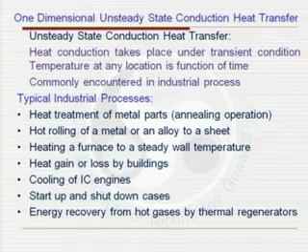This unsteady state heat conduction phenomena is a very common process in industrial processes, very frequently encountered. Typical industrial processes include heat treatment of metal parts, annealing operation, hot rolling of metal or an alloy to a sheet, heating a furnace to a steady wall temperature, heat gain or loss by buildings, and changes of environmental temperature. Suppose there is a pipeline transporting oil or water, buried under the earth at a certain depth, and the atmospheric temperature is suddenly reduced, particularly in the winter seasons.

That kind of situation is a practical example of unsteady situation, which may not be directly related to industry, but related to common life of human beings. Similarly, cooling of IC engines, startup and shutdown processes in many industrial processes involving heat generation or heat transfer encounter an unsteady state situation. There is also energy recovery from hot gases by thermal regenerators used for energy recovery, particularly hot energy recovery from flue gas. These are typical examples of several industrial processes where unsteady state heat transfer takes place.

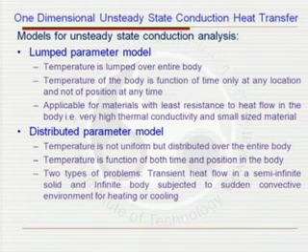There are also two situations we will discuss. One is the case of transient heat flow in a semi-infinite solid, and the other an infinite body subjected to sudden convective environment for heating or cooling. We will discuss these issues subsequently in different lectures. So there are two problems: transient heat flow in a semi-infinite solid, and in an infinite body subjected to sudden convective environment for heating or cooling. These are the two different one dimensional unsteady heat transfer problems under the distributed parameter model.

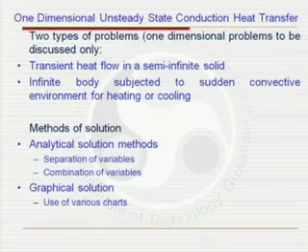Now, the solution for this kind of situation is not very easy, these are a little complicated. So we will concentrate on one dimensional cases, because three dimensional cases are more complicated. We will try to simplify the cases as much as possible, just to have an understanding of how the temperature profile exists. There are a few ways of doing the solution for these cases, and we will use two different approaches.

One is the analytical solution method, and the other is the graphical solution. Practically, the analytical solution method means the problems will be solved by the separation of variables method and the combination of variables method. So we will take up some cases for separation of variables and combination of variables, to show how heat transfer problems can be solved.

Then there is the graphical solution. In this case, the temperature profile has already been worked out by somebody else and given in the form of figures or graphs. For our learning purpose, and also for practical applications, students can find out the temperature for a particular situation using these figures or charts. At the same time, not only the temperatures at different locations of the body, but also the heat flow rate can be calculated using various charts or figures available. So we will see, with the help of certain problems, how to make use of these charts.

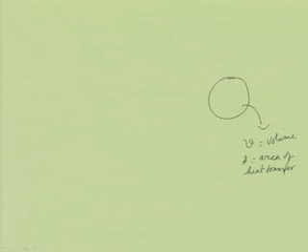So this is some object which is hot and is in some outer environment. This is the environment where heat is being transferred from it. So if I say that heat Q dot is being transferred to the environment, and let us say that environment temperature is T infinity, the temperature of the environment.

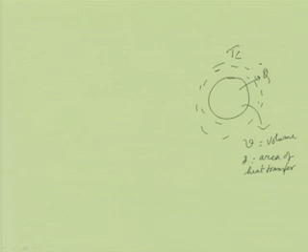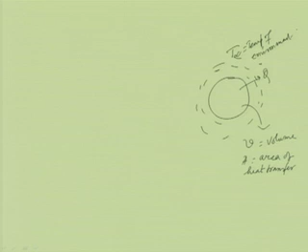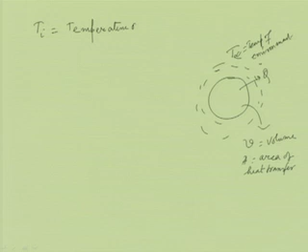And T_i is the temperature of the body at t equals to 0, that means the initial temperature of the body. Now, T infinity is less than T_i, that means heat will be transferred from the body to the environment.

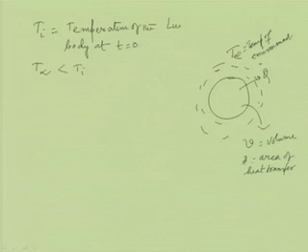Now, what we will assume is that since this is the lumped parameter model case, temperature is uniform throughout the body. Now what is happening with time? The internal energy of the body is going to come down. So the body loses heat energy, or its internal energy, and it gets transferred to the environment. So the energy lost by the body will be reflected in terms of a decrease in temperature with time.

So what we will write is that if rho is the density of the body and V is the volume as I discussed, this is the mass, and Cp is the specific heat, that is, the heat requirement per unit kg per unit mass. So rho V Cp, or m Cp, into dT by dt will be the change in internal energy. And because it is going to a lower temperature, dT by dt is a negative quantity, so we write change in internal energy as minus of this, making the total quantity positive.

Change in internal energy would be equal to the amount of heat lost to the environment, and that happens with the help of convection. So this is an example of conduction and convection phenomena taking place in tandem, together. Heat is conducted from the body to the surface, and from there convection phenomena takes place. Then we write that H is the convective heat transfer coefficient, and A is the area of the body.

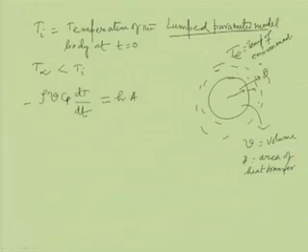That is the surface area of the body. We understand that in case of a sphere it is 4 pi r square, in the case of a cylinder it is 2 pi r L plus 2 into pi r square, that is the two end areas added. Similarly, in case of a cube, it is 6 into side square.

So this will be the surface area of heat transfer, meaning the area which is exposed to the environment for the transfer of heat. Now, H A into, at any time t, the temperature of the body minus T infinity -- this is as per Newton's law of cooling, that heat transfer is H A delta T. So we write T minus T infinity in the same equation.

Now, this is a very basic equation for the energy balance that is happening. The rate of change of internal energy is equal to the rate of heat transfer by convection from the solid body to the environment.

We will assume that volume and area are not functions of time. Also we assume H, rho and Cp are independent of time, they are constant quantities. Thus, if we do the integration, we get T minus T infinity by T initial minus T infinity equals e to the power minus H A by rho Cp into V into T.

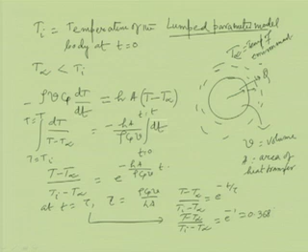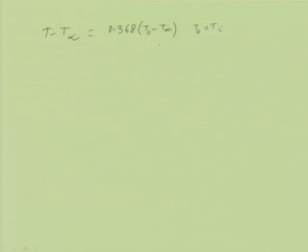So what does it mean? It means that T minus T infinity equals 0.368 of T naught minus T infinity. Initially, this was the temperature difference between the body and environment, and after time constant t equal to tau, that value is reduced to 36.8%. So at t equal to tau, t minus t infinity by t naught minus t infinity is equal to 0.368. That means, at time t equal to tau, the temperature difference in the body becomes 36.8% of the original temperature difference. That is the definition of a time constant.

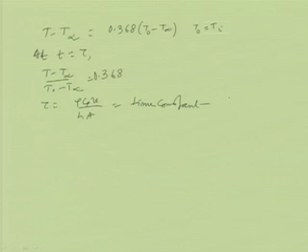So tau, when tau equals rho Cp V by H A, is called the time constant. So time constant is a time, and the unit of rho Cp V by H A is time. So time constant is the time that is needed for the temperature difference in the body to reach 36.8% of the initial temperature difference.

So initial temperature difference was T naught minus T infinity, and after the time constant the temperature difference T minus T infinity becomes 36.8% of T naught minus T infinity. This is called the time constant, and rho Cp V by H A is called the time constant.

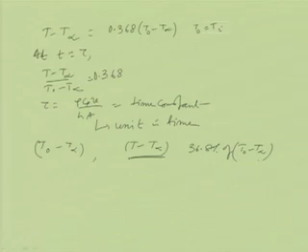This is one very important piece of information that we can develop from this, and in future when we study any first order processes, we will learn about this time constant. So this drop in temperature in the body is also viewed as a first order process.

Now if we go for further analysis, we have the expression H A by rho Cp into V, that is the inverse of the time constant. If we write this in a more organized way, we get H into V by A, by K, into K by rho Cp, into V by A whole square. This is the expression we are going to get.

We say that V by A is equal to L, the characteristic length. We can easily understand that V by A is the characteristic length, because V has units of volume, meter cube, and A has units of area, meter square. So V by A has units of length, and we call V by A the characteristic length. So we write this as H L by K, into K by rho Cp.

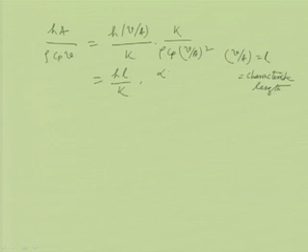We know that K is the thermal conductivity of the body, and rho Cp, we know alpha, K by rho Cp, is the thermal diffusivity, which has units of meter square per second, and V by A we will write as L square.

This is conductive resistance to convective resistance, and both are for heat transfer. So, it is a ratio of two resistances, Biot number is a ratio of conductive resistance to convective resistance, for heat transfer. And the important point here is...

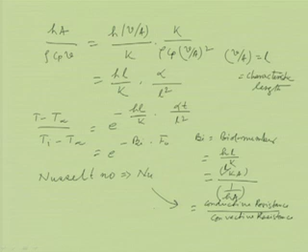In subsequent lectures, we will come across another terminology called Nusselt number, denoted as Nu. This also has a similar physical significance - it can also be expressed as conductive resistance to convective resistance. But the difference between Nusselt number and Biot number is that Nusselt number refers to the conductive resistance of the fluid. This terminology exists when there is heat transfer between a solid and fluid. So, Nusselt number relates to the conductive resistance of the fluid, whereas Biot number relates to the conductive resistance of the solid. This is the major difference between Nusselt number and Biot number.

The other terminology is called Fourier number, Fo, and we have seen it is expressed as alpha t by L square. Now, this is usually expressed as...

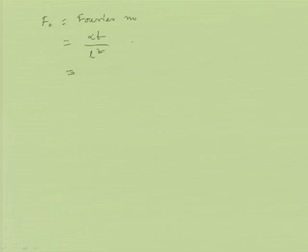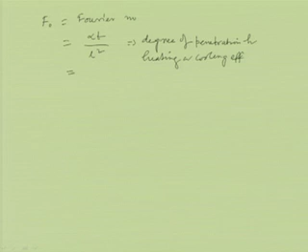If we say that it is an indication of the degree of penetration of heating or cooling effect through the solid.

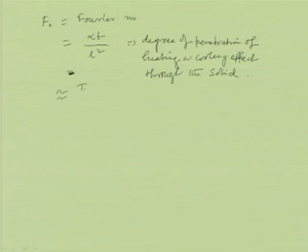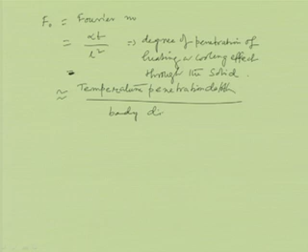It can also be expressed as the temperature penetration depth by body dimension. So, alpha into T is the temperature penetration depth, related to thermal diffusivity - how much the thermal or temperature profile has penetrated into the body with time t, and L square is the body dimension. This way, Fourier number is also a dimensionless quantity.

Thus, we can say that T minus T infinity by T I minus T infinity is equal to e to the power minus Biot into Fourier. And also we have seen that Biot number is the ratio of conductive resistance to heat transfer to convective resistance to heat transfer, and when Biot is very small, that means conductive resistance is very small.

So, what we said at the beginning is that lump parameter model is applicable when the temperature variation in the body is negligible - that means the thermal conductivity is very high, meaning thermal conductive resistance within the body is very low, meaning the Biot number is very low. So, it is expected that lump parameter model will be very much applicable when Biot number is very low.

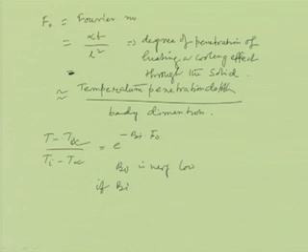For Biot number very low, the lump parameter model can be applied, and it is reported that if Biot number is less than 0.1, then lump parameter model can give a reasonable estimate, within 5% of error. So, if Biot number is less than 0.1, lump parameter model can give an estimate within 5% error.

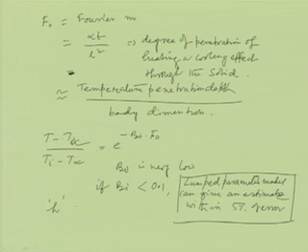What is being suggested is that, because there is always a good amount of uncertainty in calculating the value of H, convective heat transfer coefficient, uncertainties sometimes rise within 25%. So, this is a huge uncertainty in calculating convective heat transfer coefficient, whereas the uncertainty using the lump parameter model, if the Biot number value is much less, is within 5%. Therefore, it is advisable that when trying to find the heat transfer rate or flow of heat or temperature profile in a body, first try out whether the lump parameter model is applicable or not - that will make the cases simpler.

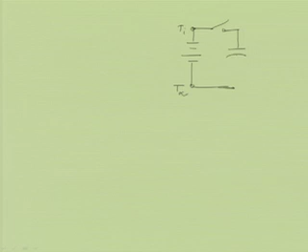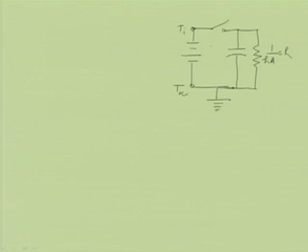Now we will draw a thermal network for a single capacity system, for a single body, analogous to an electrical system. T I is some temperature, and this is T infinity, the environmental temperature, with a switch here. This is 1 by H A, equal to resistance R, and this is the capacitance, equal to rho C P into V. So this is a thermal network for a single capacity system.

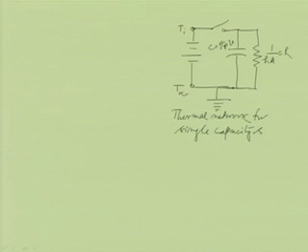If we try to understand the situation: this is a switch, and there are two potentials, T infinity and T I. T I is the initial temperature of the hot body, and T infinity is the environmental temperature. When you put the switch on, the body is charged, the capacitor is charged with this potential difference. The capacitor is charged with the thermal potential of T I.

Once we switch off, this energy will be released through this resistance in the circuit. So the capacitor is holding that energy, equivalent to the potential difference of T I minus T infinity, at the initial condition when the switch is on. Once you switch off, the circuit is disconnected, and this energy will be released to the environment, where the resistance is 1 by H A. So from the surface, it is getting to the environment with the resistance of 1 by H A.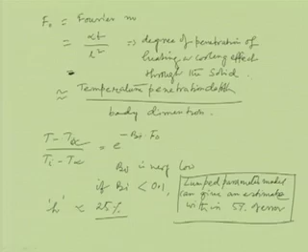So this is some understanding about the representation of the lumped parameter model system in the form of a thermal network for a single capacity system. Here it is a single capacity because we have only one body, and energy is stored in that particular capacitor. Now we will take up problems on these particular issues.

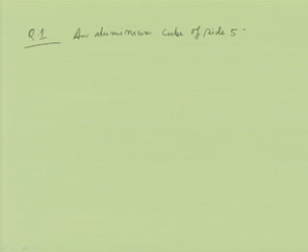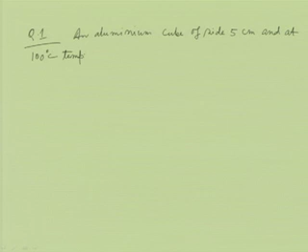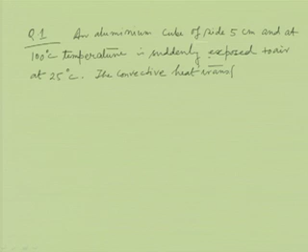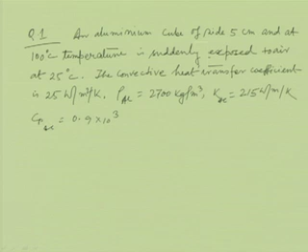We will discuss a few problems. Question 1: An aluminum cube of side 5 centimeter, at 100 degree centigrade temperature, is suddenly exposed to air at 25 degree centigrade. The convective heat transfer coefficient is 25 watt per meter square per Kelvin. Rho aluminum is equal to 2700 kg per meter cube, and K aluminum, thermal conductivity, is equal to 215 watt per meter per Kelvin.

Cp, specific heat of aluminum, is equal to 0.9 into 10 to the power 3 joule per kg per Kelvin. The problem is: calculate the time required for the center temperature to reach 40 degree centigrade. So this is the problem.

The problem is that there is an aluminum cube of side 5 centimeter, at 100 degree centigrade temperature, suddenly exposed to air at 25 degree centigrade, and it will be losing energy from the cube to the environment. So if it loses the energy, we have to find out at what time it will be reaching a temperature of 40 degree centigrade. That is the question.

Before we proceed for lumped parameter analysis, we have to first check whether the lumped parameter analysis is applicable or not. The checkpoint is that we will check the Biot number. If the Biot number is less than 0.1, we will say that the lumped parameter model is applicable. So we will calculate Biot number, which we know is H L by K, or H into V by area, by K.

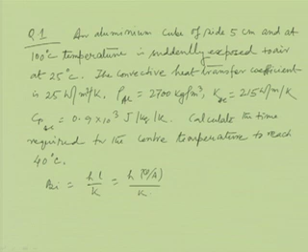Now here we have to see that it is a cube. So for a cube, volume is equal to length cube, and what is the surface area? All the surfaces of the cube are exposed to the environment, meaning there are 6 surfaces exposed to the environment. So what we get is V equals...

0.05 whole cube, in meter cube, since 5 centimeter is 0.05 meter. So 0.05 meter cube is the volume, and area is equal to 6 into side square, so 0.05 whole square, in meter square.

So we will get V by A equal to, if we do the calculations, 5 by 6 into 10 to the power minus 2 meter. And then what is the value of Biot number?

If we do the calculations, Biot number equals 25 into 5 by 6 into 10 to the power minus 2, divided by K for aluminum which is 215. The unit of Biot number is unitless, a pure number, and this value comes out to 0.00097, which is much less than 0.1.

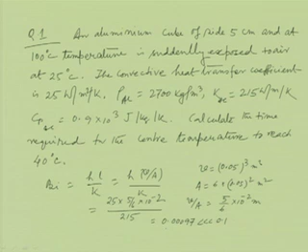So with this check, we can say that Biot number is much less than 0.1, so the lumped parameter model is applicable. That means the conclusion we draw from this check is that the lumped parameter model is applicable.

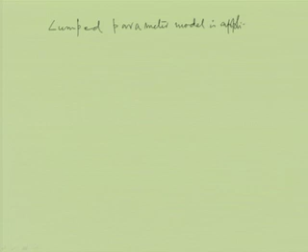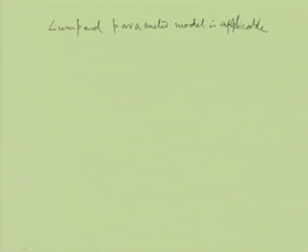So once the lumped parameter model is applicable, now we enter into the temperature equation to find out the temperature profile. Actually, we know the temperature, we have to find out the time required for a certain change in temperature. So we need the temperature profile, which we have already seen: T minus T infinity...

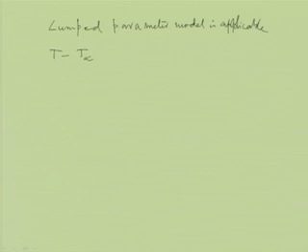T minus T infinity by T initial minus T infinity, and that is equal to e to the power minus Biot into Fourier. Biot number values we have already seen. Now for Fourier number, we have alpha t by V by A whole square, that is alpha t by L square, where L means V by A.

Now actually what we have to calculate in this problem is this temperature, and we have to calculate this time. So what we will do is use that ln of T minus T infinity by T initial minus T infinity equals minus Biot into Fourier. This value is known to us.

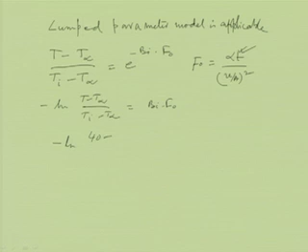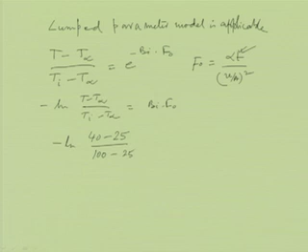So for my case, the time we want is when T equals 40 degree centigrade. So we get minus ln of 40 minus T infinity, which is 25, divided by 100 minus 25, and that equals Biot into Fourier. Whether we write in Kelvin or centigrade scale doesn't matter, because finally we are getting the difference of temperatures.

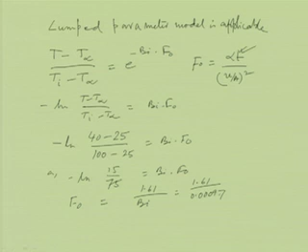So minus ln of 15 by 75 equals Biot into Fourier. So we can say the Fourier number equals minus ln of that, which is 1.61, divided by Biot number, and this equals 1.61 by...

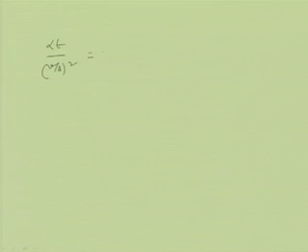0.00097. And then we say alpha t by V by A whole square equals 1.61 by 0.00097. From there we can say alpha t equals, that is the time requirement we have to calculate, it is 1.61 by 0.00097 into V by A whole square.

That gives 25 by 36 into 10 to the power minus 4 into alpha, or rather it will be 1 by alpha. 1 by alpha is equal to that, so we have to calculate alpha. Alpha is equal to, as we have seen, 8.85 into 10 to the power minus 5.

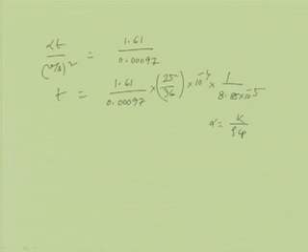How to calculate alpha? Alpha is equal to k by rho Cp, and the values are given to us: K is equal to 215, rho is equal to 2700, Cp is equal to 900. This gives 8.85 into 10 to the power minus 5 meter square per second.

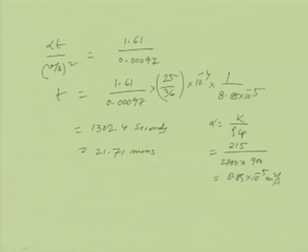So if we put these values here, we get this value becomes 1302.4 second, which is equal to 21.71 minutes. So that means the aluminum cube will come down to 40 degree centigrade temperature at 21.71 minutes. So this is the problem.

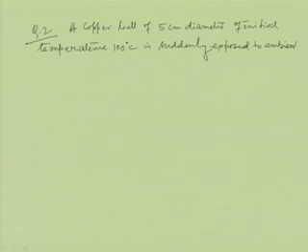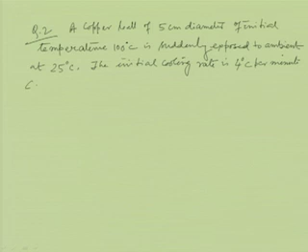Now let us see another problem. Question 2: a copper ball of 5 centimeter diameter, of initial temperature 100 degree centigrade, is suddenly exposed to ambient at 25 degree centigrade. The initial cooling rate is 4 degree centigrade per minute. Calculate the convective heat transfer coefficient, assuming that the lumped parameter model is applicable.

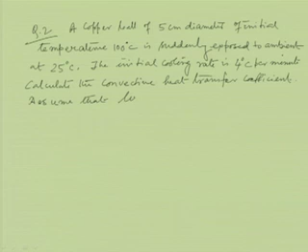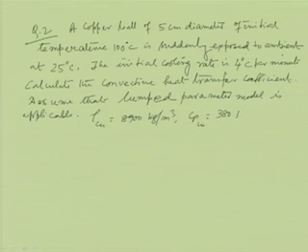Rho copper is equal to 8900 kg per meter cube, Cp of copper is equal to 380 joule per kg per Kelvin, and thermal conductivity K for copper is equal to 370 watt per meter per Kelvin.

So now the problem is there is a copper ball and the copper ball is losing energy. As the temperature of the ball changes with time, we have seen that in the basic equation the temperature is changing with time. So dT by dt, the rate of change of temperature, will gradually change because it is losing energy. At a very high temperature the rate of change in temperature will be much higher than at a very low temperature, because the driving force will gradually decrease.

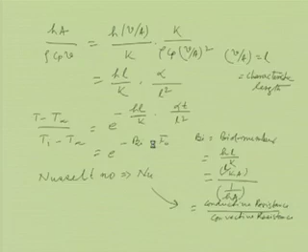As we previously discussed, the driving force here is T minus T infinity, and this driving force will gradually decrease as time goes on, because the hot body will be gradually cooling down. So therefore dT by dt will go on decreasing.

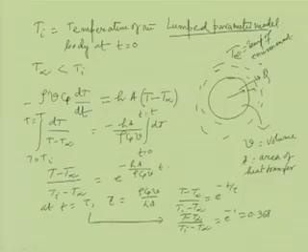Therefore dt by dt will be changing, and an initial value is given for this problem. It is a decreasing value since it is cooling; the initial cooling rate is 4 degree centigrade per minute. So we will convert it: minus dt by dt, the cooling rate, is 4 degree centigrade per minute, which equals 4 degree centigrade by 60 per second.

Now if we look at our basic equation, the rate of heat transfer: minus rho Cp V into dt by dt is equal to H into area into T minus T infinity. dt by dt is given, rho is known, Cp is known, volume of the copper ball is known, and surface area of the copper ball is 4 pi r square, that is also known. T is known, so H has to be found out.

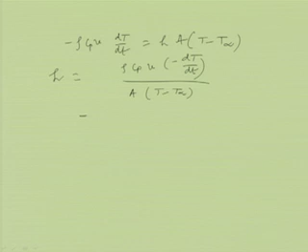So that way we can find out that H is equal to rho into Cp into V into minus dt by dt, divided by area into T minus T infinity. Here the values are rho equal to 8900 kg per meter cube, Cp value is 380 joule. We have to be very careful about the units, and V is the volume, which is 4/3 pi into r cube.

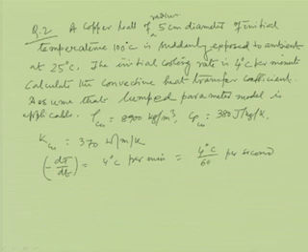Let's reduce the problem slightly by taking a copper ball of radius 5 centimeter. With this radius the calculations proceed accordingly: 8900 into 380 into 4/3 pi into 0.05, that is 4/3 pi r cube for the volume, into the cooling rate of 4 by 60.

We will write first, area is again 4 pi into r square, 0.05 whole square, into 75, where T minus T infinity is 75, into this 60 which comes from the conversion of degree centigrade per minute to degree centigrade per second.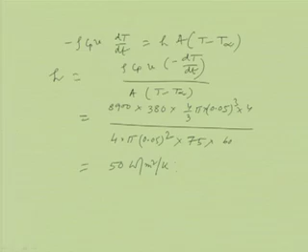So this value comes to be around 50 watt per meter square per Kelvin. This is H A delta, so it becomes 50 watt per meter square per Kelvin. So this H, the convective heat transfer coefficient between the copper ball and the environment, is 50 watt per meter square per Kelvin.

So we can calculate, even by doing some experiment with proper measurement of temperatures, how the convective heat transfer coefficient can be found using the lumped parameter model. So we will stop here for this lecture.

In the next lecture, we will discuss unsteady state heat transfer for the distributed parameter model system, when the temperature does not remain uniform in a body, where the temperature varies with position in a body. So we will discuss this in the next lecture. Thank you very much.